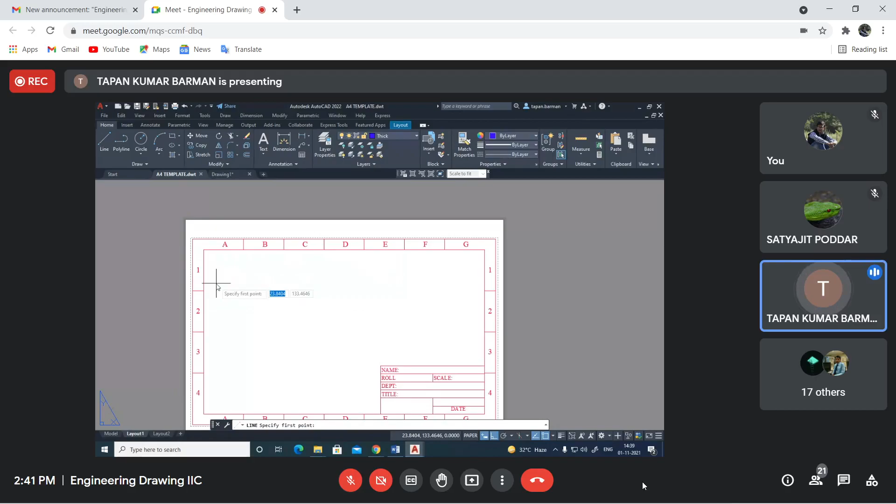Say for example I am using 1:5 scale. So what should be the value of this? 300 divided by 5, that means 60 millimeter. So I will make one line of 60 millimeter, and I will make that thing. Do you understand this?

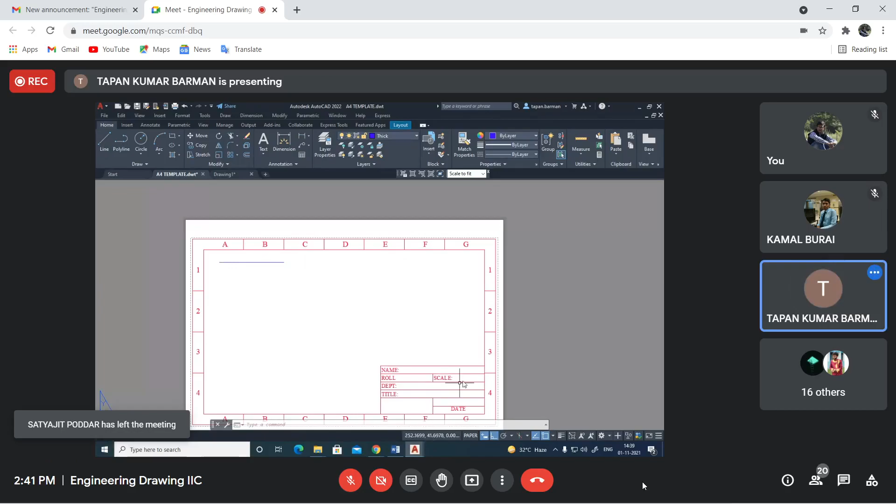But my requirement was 300 millimeter, and I am using scale as say 1:5. So manually I have to divide that dimension by 5 and draw a 60 millimeter length line, but I need to change the dimension. When I put the dimension, it will show 60 millimeter only. But I need to change it, because in the scale I have to write scale as 1 to...

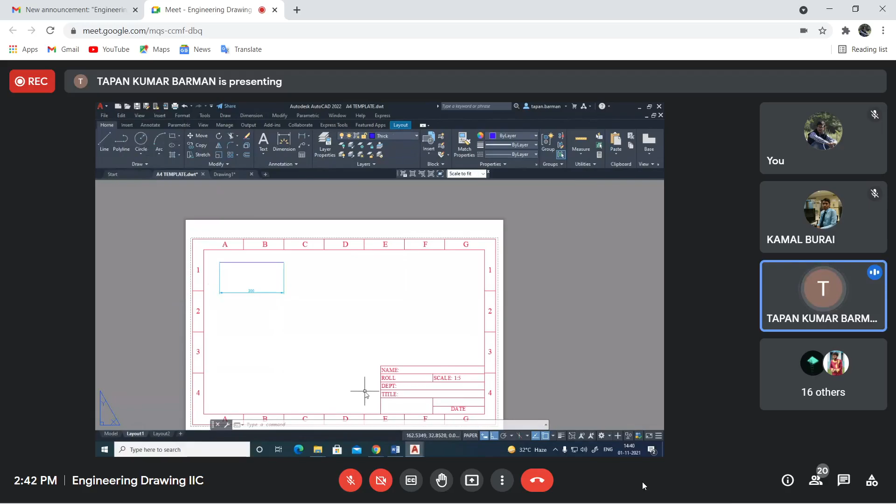1:5. So this 60 is not basically 60, so I have to change the value to 300 millimeter. I'll use the text override option and put 300 millimeter. Then only we'll understand from the drawing that the line is 300 millimeter length.

Understand this thing? In your manual drawing, in your engineering drawing class also, you learn this thing. Is it clear? Is there any doubt?

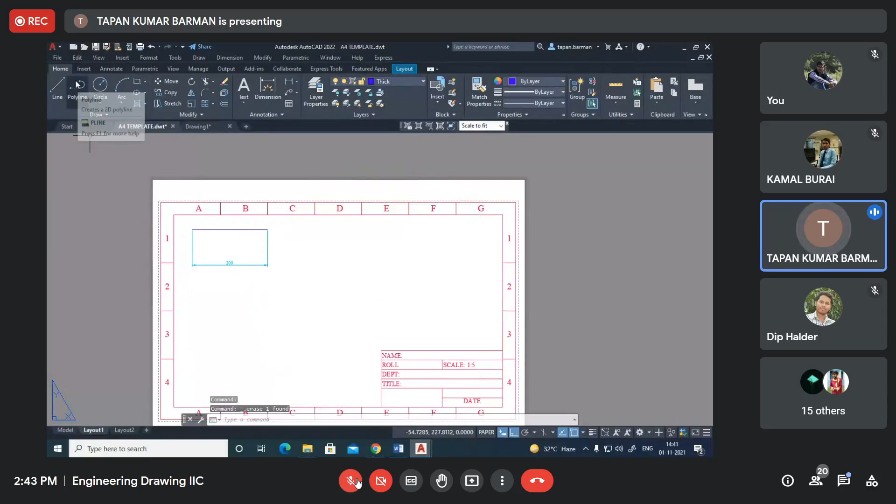Okay, say for example I am making one circle of say 100 millimeter dia -- no, 100 millimeter radius, say. So you see, I cannot make that circle here. So what I have to do? I have to reduce the dimension. So 100 divided by say 5, that is 20 millimeter is the radius.

Okay, now when I'll put the dimension, you see it is 40. But when I have made the drawing at that time it is 40, but original dimension was 200, or radius was 100 millimeter.

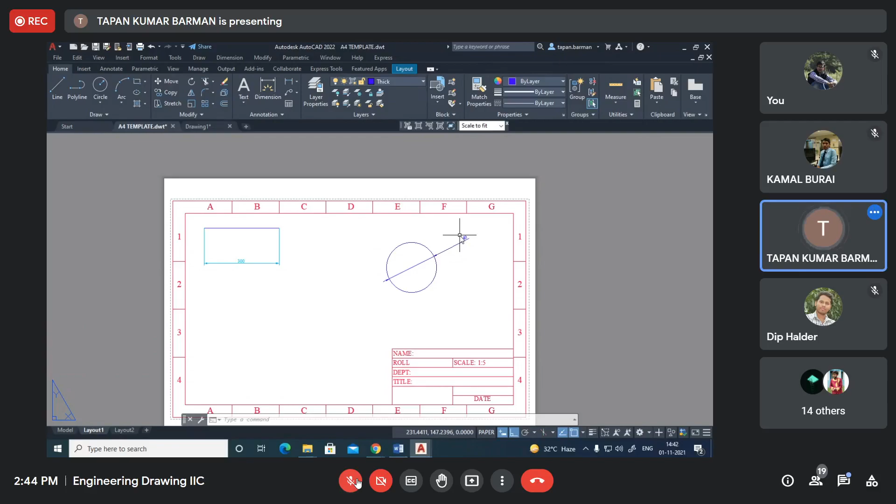But when I am using scale 1:5, I need to change that value. Manually I have to divide that 100 millimeter by 5, 20 millimeter should be the radius. Do you understand this thing? This is a concept we use in our engineering drawing class.

Now, when I write 40 millimeter here and scale is 1:5, but when I will measure using one scale, that value should be 40 divided by 5, that is 8 millimeter. But that is not here. So I need to modify this dimension.

I have to select that thing, right click, properties, and from the properties under text, you will find text override option. So here I should write 200 because I have used scale 1:5. So it should be 200 millimeter.

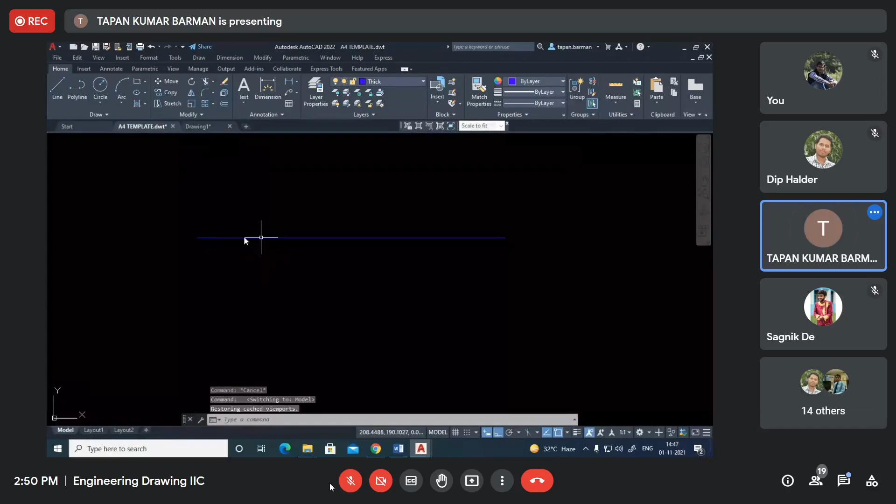Understand? Now I have made one line of say 300 millimeter length here in model space. The same type of line of 300 millimeter I have made here in paper space using a scale 1:5.

Now, if we may access the model space, that means this line inside this paper space, then we can fit our drawing inside this. Now our target will be to access the model space. This is paper space. I will try to access the model space inside this paper space.

Sir, your voice is breaking. Is it true for all students? No, sir, it's okay. So then I have an internet issue. Yes, probably. So later on I will also upload the recorded class. Please go through it.

Okay, sir. Now the thing is, from view, we may insert one thing, viewports. Later on we will discuss what is viewports. First you see what happens. Viewports, under viewports, I am taking say one viewport. Say for example, I am making one boundary or window like this.

The boundary, after selecting the boundary, basically I should select the proper layer. So viewport layers, we have made one viewport layers. So this is viewport layers. Now inside this you can see one blue line. That blue line is basically the line I have made in model space. So using viewport, we may access the model space.

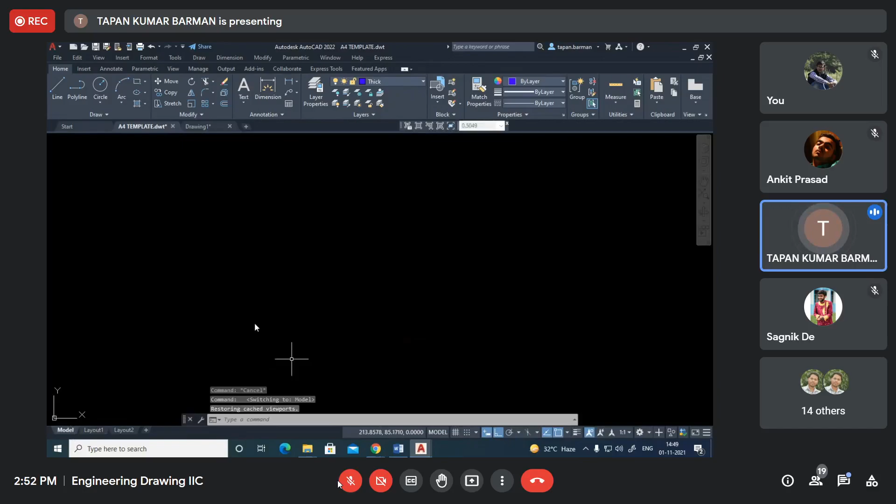Can you see this thing? So this is model. Inside the line, if I delete this line, say for example, I am deleting this line. In model also, that line is not available. Understand? Because I am accessing the same model space inside the paper space using the concept of viewport.

Say for example, I am making one line. Say this is a starting point. I want to make one line of say 300 millimeter. Now let us see whether in model space that line has been drawn. Yes, that line is there.

Say for example, here inside this, I want to make one circle. Okay, I am taking some midpoint. What is the value? Say 100 millimeter. Okay, let us see that circle is also here.

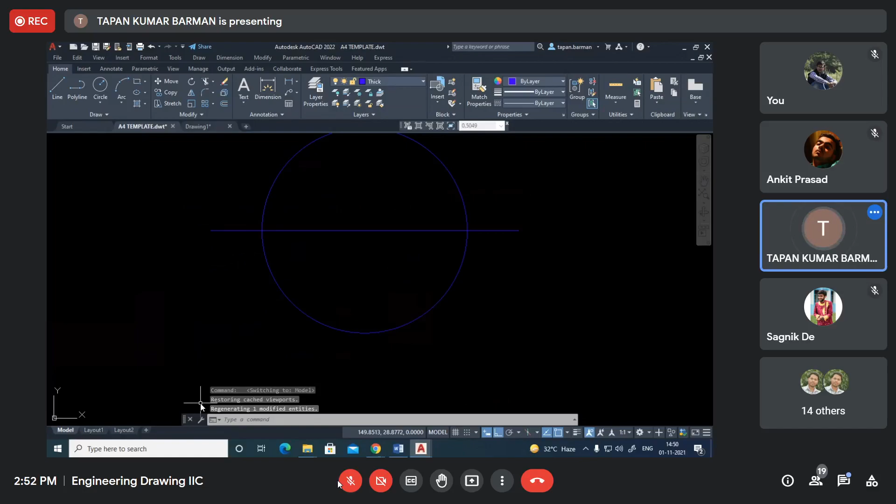Now, do you understand that inside this paper space, using the viewport, we may access the model space? Yes, sir. Is there any difficulty to understand this concept? No, sir. You see, in our last assignment, we have made the lines only in this paper space.

But here, inside this paper space, making one boundary or using one viewport, we can access the model space. And in that model space, we can make our drawing in 1:1 scale.

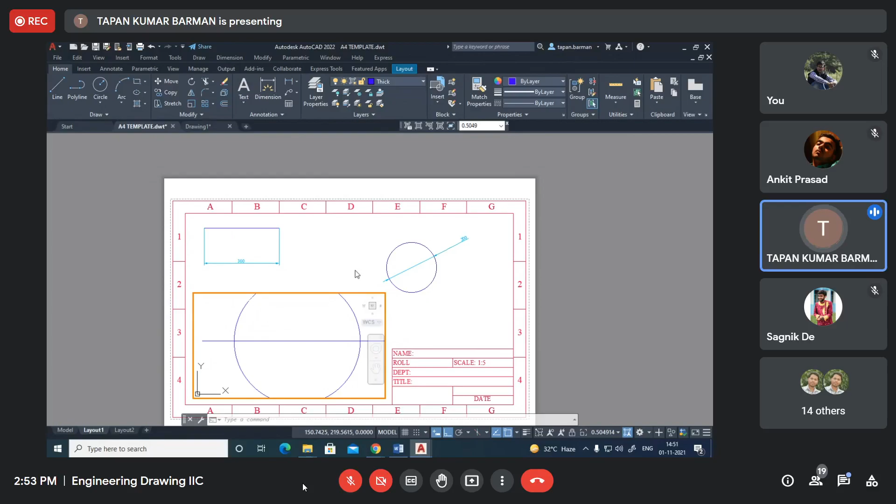Now, what I can do here, I can select the boundary, and this is called viewport toolbar. And from here, I can make say 1:5.

Now, you see, if I try to put the dimension, I should get 300 millimeter. Let us see. Dimension, linear dimension from here up to this. This layer should be changed to dimension layer.

Is there any difference between this one and this one? Yes, this is drawn in paper space, this is in model space.

So same thing can be drawn in model space using 1:1 scale. After making 1:1 scale, depending on the paper size, depending on the layout or template, you may select a proper space, a proper scale to fit your drawing inside your available space.

This concept is clear to you? Yes, sir. Is there any difficulty to understand this thing? Okay, I am deleting this thing.

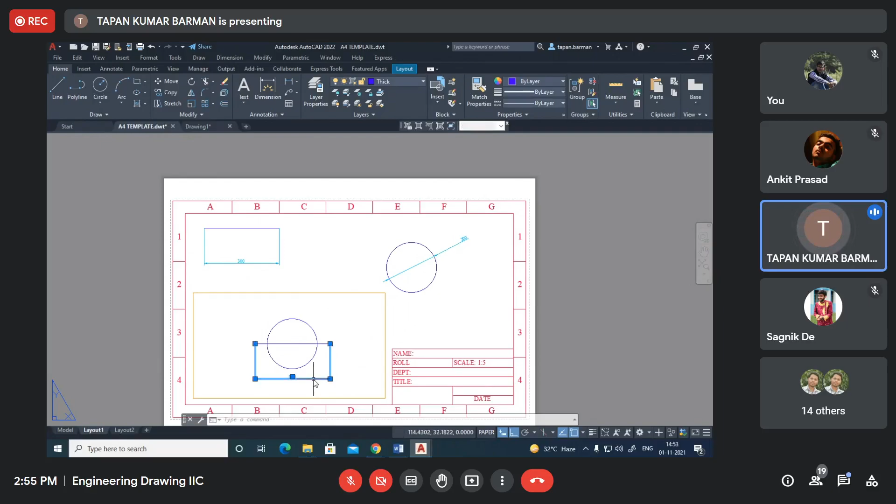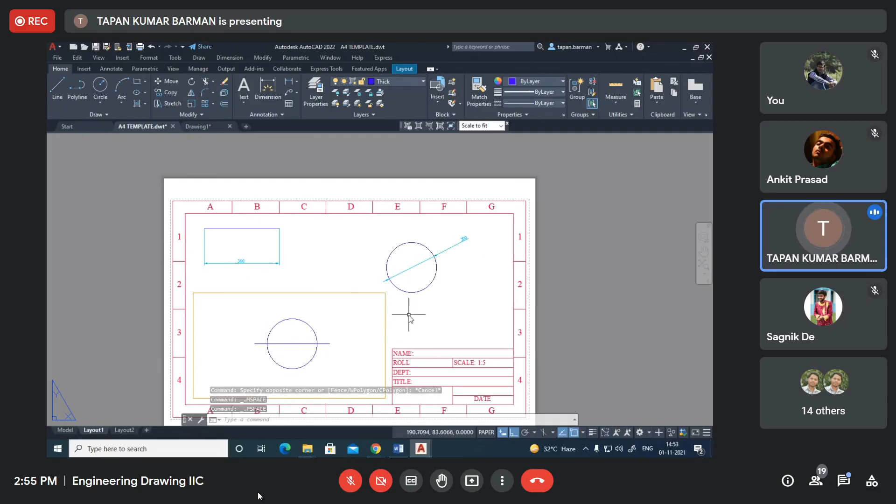Right now, I am in paper space, right? You see, this is paper space. When I will be in model space, you see, this boundary will be very thick. Double click outside this paper space, outside the boundary, then you will come to paper space, or from here also, you may change paper space to model space or model space to paper space.

Now what happens if I draw anything in paper space, whether that information will be transmitted to model space? The answer is no. Let us try. Say for example, through this I am making one line. Now see, I have drawn this vertical line in paper space. Now in model, you see that vertical line is not available here because we have made that vertical line in paper space. It is not in model space.

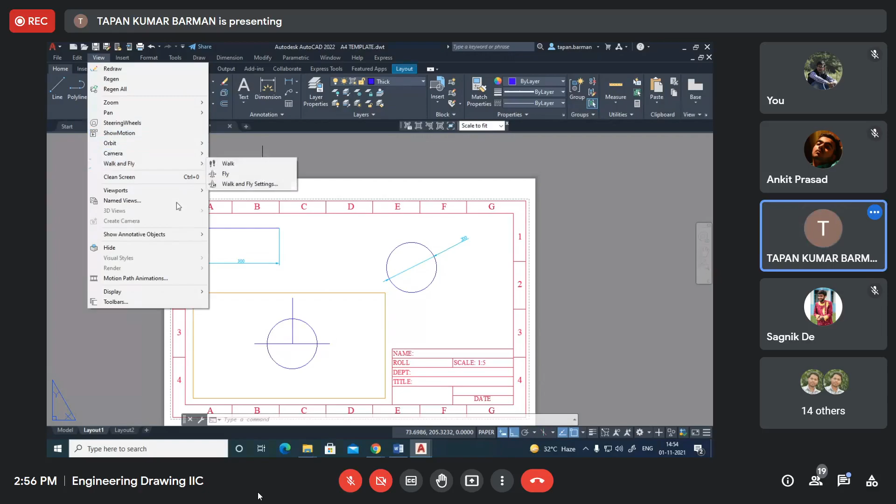If I draw anything in model space, that drawing will be available in other model spaces also, or other viewports also. Say for example, I am making another viewport. I am deleting this thing. View, viewports, another viewport, say here. I am changing the boundary of the viewport. Now see, the same thing is also here.

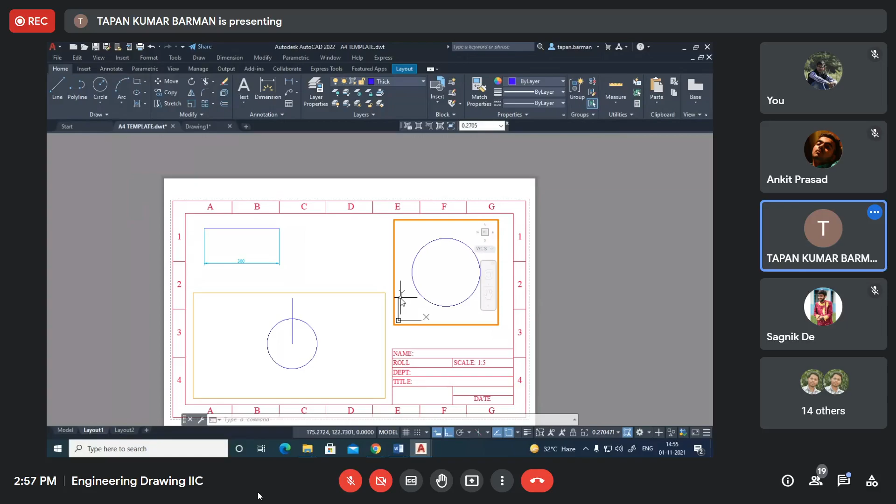If I double click here, I can access the model space inside this viewport. If I delete anything here, you see the selected objects will be deleted from the model space. So if I insert a number of viewports, we may access the model space. Is it clear to you? But if I draw anything in paper space, that information will not be available in model space. Is it clear to you? Is there any question? Can you do this with your computer? Can you do with me?

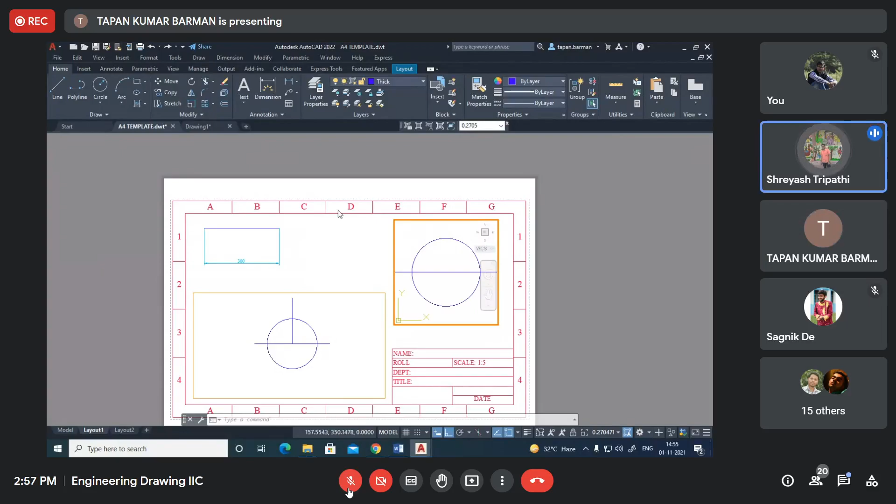Hello, sir. Sir, actually, when I am opening this template, then my previous work is showing. You open your template only. Yes, sir. But the assignment which I have done, that is showing. Then you save your file in a different name. Then you delete that part. Definitely that window will not come then. Understand? Basically the recent files are showing there. So somewhere you have saved your template. So you should not disturb your template.

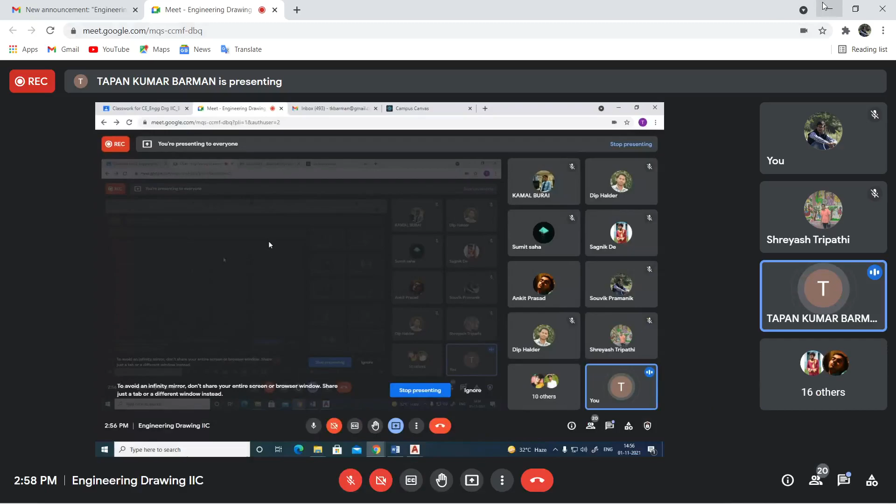You may open your template, you may draw, and you may save your drawing file, DWG, in a different name. Always you should open your template. You may work over there, but you should save in a different name for that assignment. So right now, you may select all the drawings and delete them. Then you may work over there. Understand? Okay, sir. So this concept is clear to you?

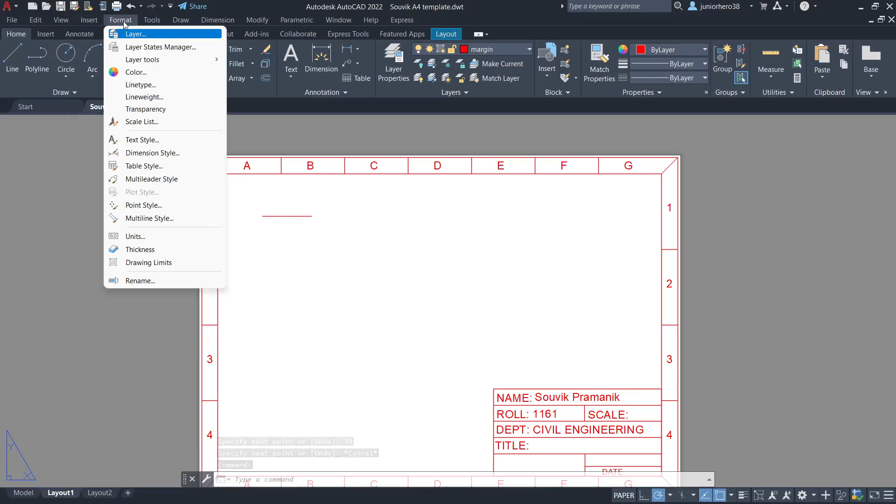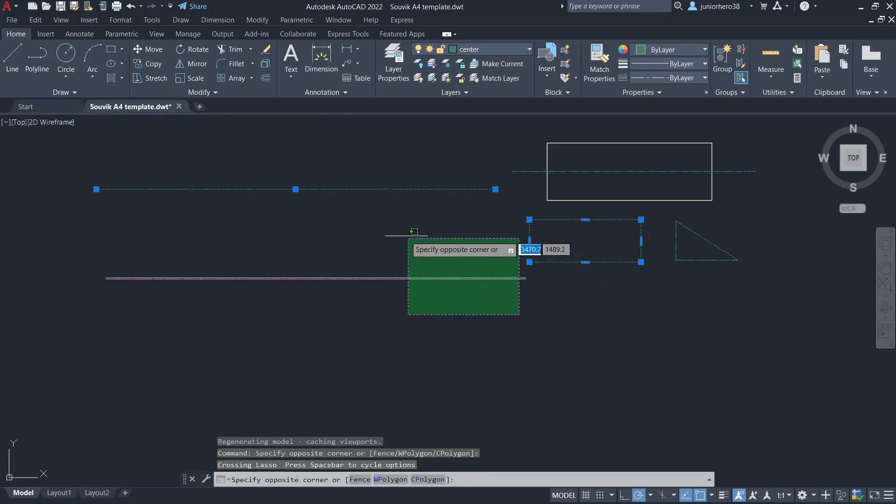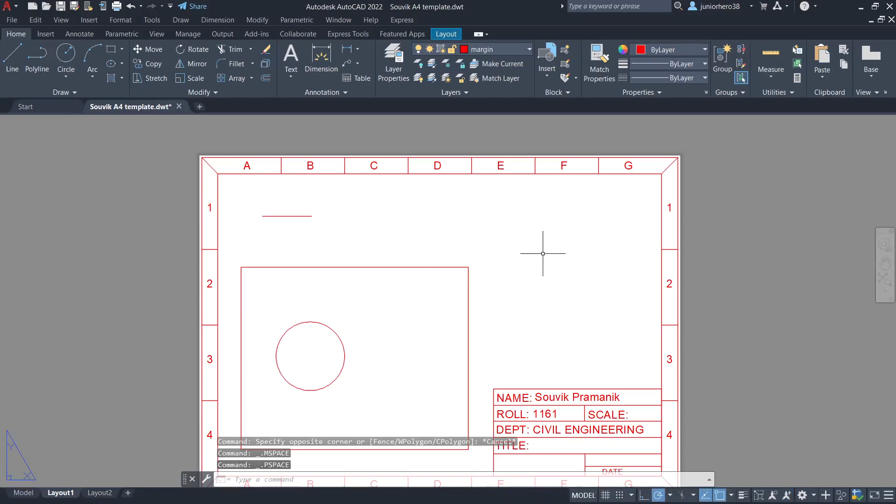Now, for the earlier drawing, you have made the dimensioning, right? Here also I have made the dimension. Say for example, I want to make this as 1:2 scale. Oh, sorry. I am increasing the boundary of this. I'm deleting this thing. Okay. So now the scale of this drawing is 1:2, and the scale of this drawing may be 1:5. So I am changing the scale here. So here scale is 1:2, here is 1:5.

Text. Okay, yes, 1 minute. Hello, sir. In AutoCAD 2007, I can't find the scale menu. Okay, 1 minute. Writing it. Scale, say 1:2. Sorry. Okay. Say scale 1:2. Here is scale 1:5.

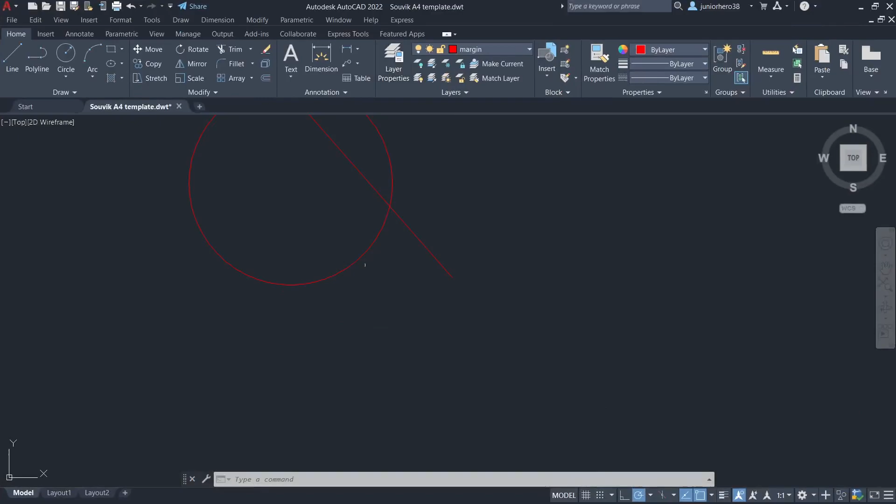Now how to change the scale? For that purpose, you need to find the viewport toolbar. So how to find the viewport toolbars? From tools, you will find toolbars. Under AutoCAD, you will find viewport. This one. Can you find this? For AutoCAD higher versions, you will find it this way. For AutoCAD 2007 also, from tools under AutoCAD, you will find it, or by right clicking you may get the toolbars, and from there you may find viewports. Are you getting this point? Have you got this viewport toolbar?

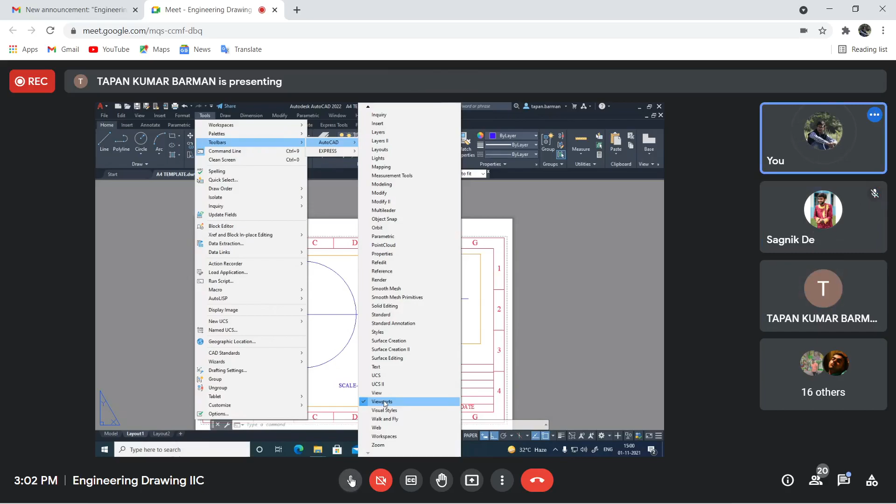Yes, sir. Okay, so you have to place your viewport toolbar where space is available. I have put mine here. You may put it at this position also, that is up to you. Once you have the viewport toolbar, you have to select the boundary. But when? When you are in paper space. By selecting the boundary, you may change the scale from here. It may be 1:2, 1:5.

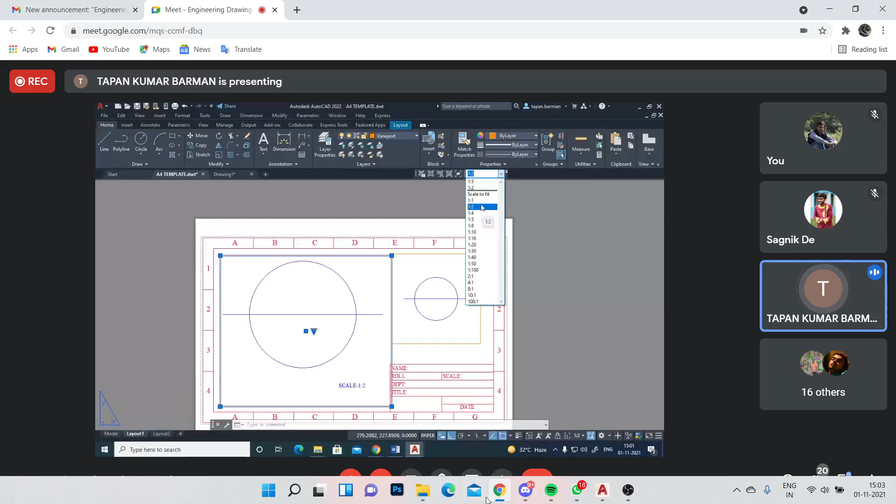For engineering drawing class, we should select the appropriate standard scales. It may be 1:1, 1:2, 1:5. 1:4 we do not use, 1:8 we do not use. So we use 1:1, 1:2, 1:5, 1:10, 1:20, 1:50 like this. Or 2:1, 5:1, 10:1 like this. Sorry, I changed it. This is okay now.

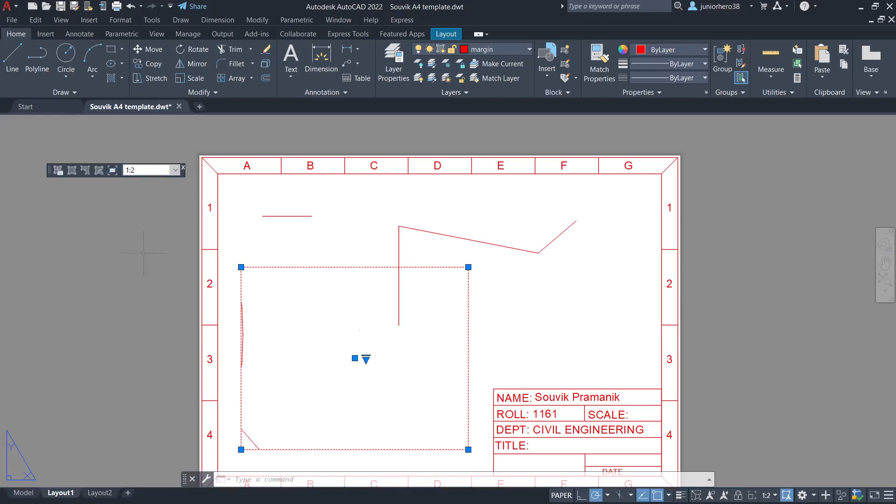Sir, is it possible to adopt 1:200 type scales? Yes, possible. 1:100, you may type here. Oh, okay, sir. Also 2000 is possible, that is up to you. If the scales are not available here, you may type the value here. Okay. Up to this, can you draw?

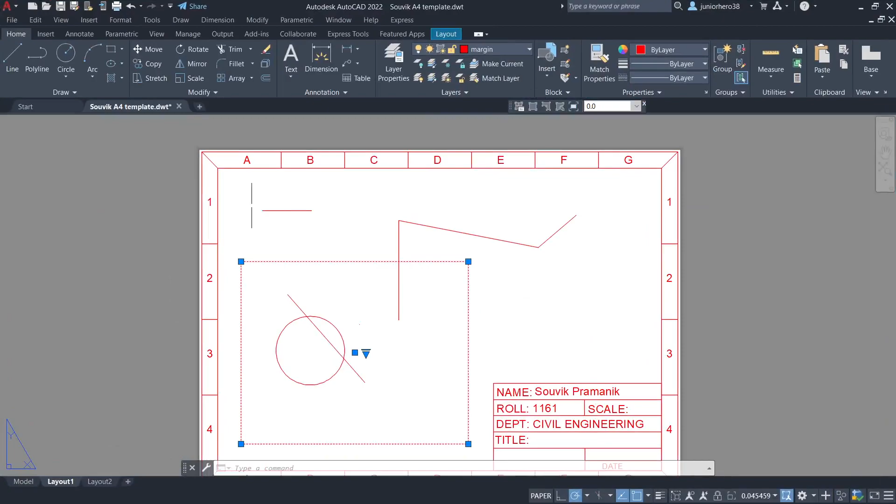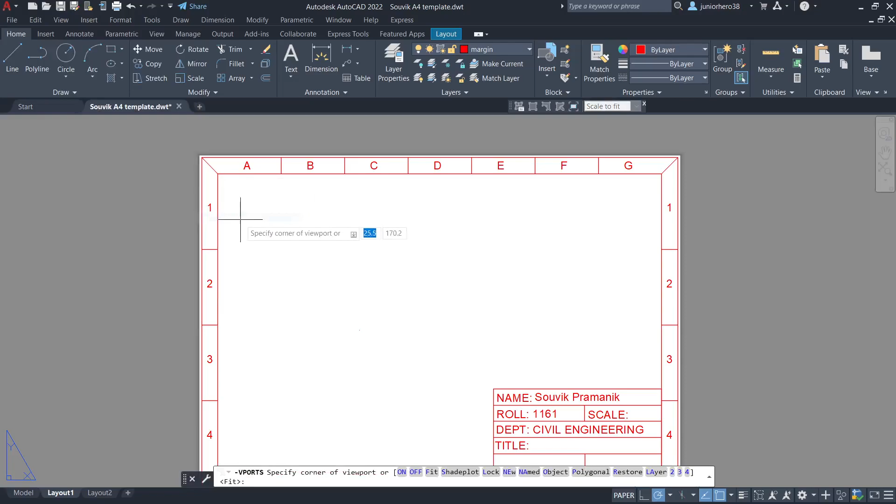Any problem? Are you doing it? Please do. If you face any problem, please let me know. It's one important tool we use in our AutoCAD drawing.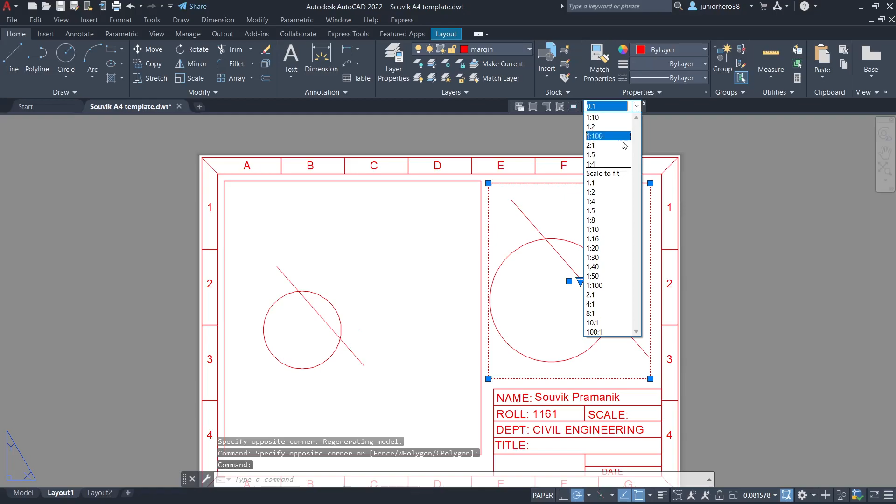Hello, sir. Yes, I can hear you. Sir, I'm drawing in model space, but it's not showing on the viewport. Okay, you may share your screen then. So, I have drawn this circle, but it's not showing on the viewport. Okay. Then in the command line, you type zoom, Z, enter, all. Go for all.

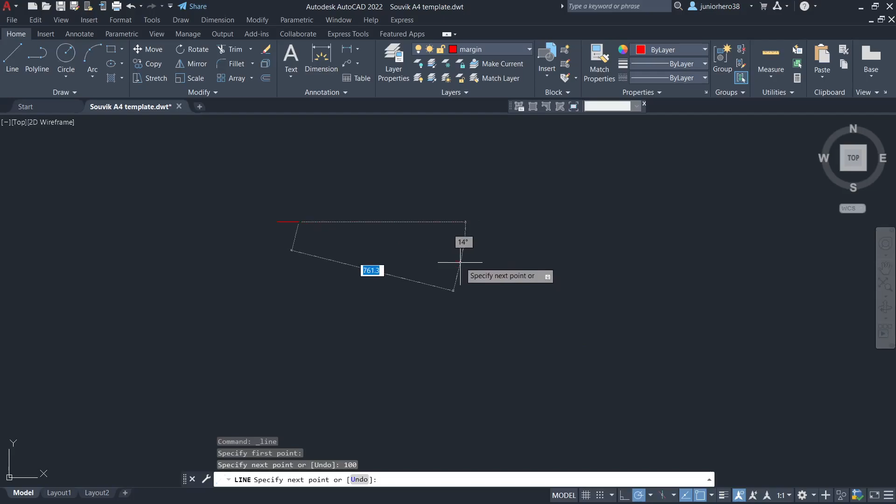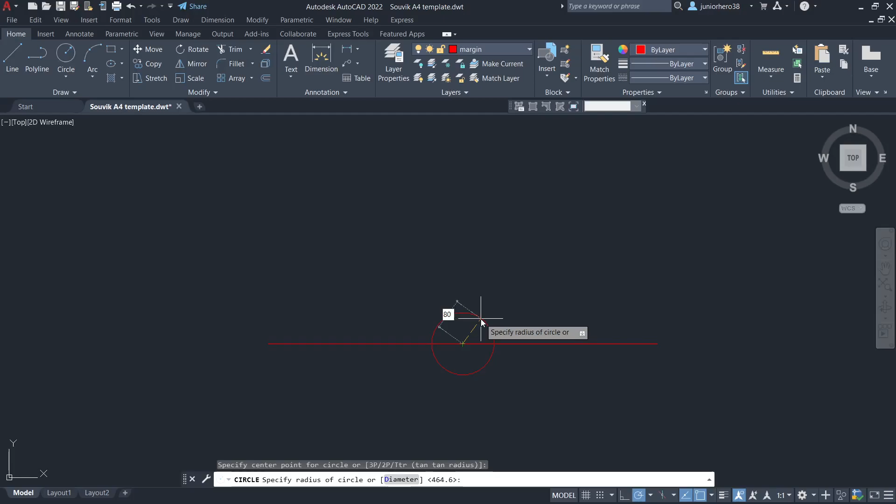Sir, maybe he didn't select the viewport. No, it should come automatically anyway. Yes, you select that one. Select that. Now you put the command. You go to model space, not paper space. Right now we are in paper space. Not here, in layout one, where coordinates are showing. After that you will find paper. You select model. Okay. Now you put the command. Okay, sir. Zoom all.

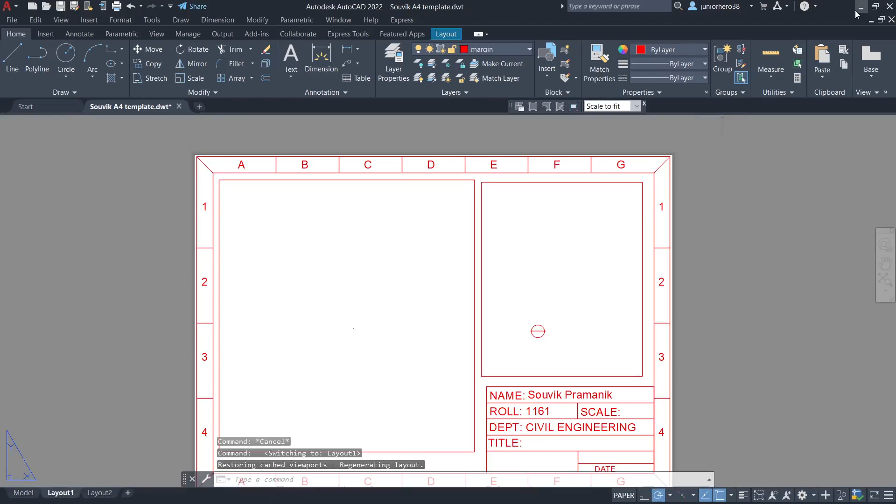Sir, but if I want to select this one? Yes, double click inside the boundary. Not the boundary, inside the boundary. I'm clicking. Then the boundary should be thick. It is paper space. Double click inside the boundary. You want to make the viewport. Yes, sir, I'm clicking, but the viewport is not showing there. It is only in paper space.

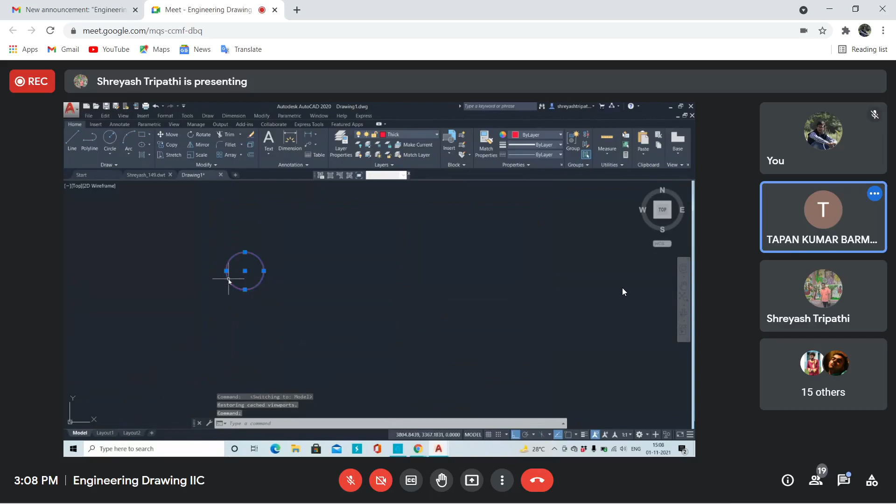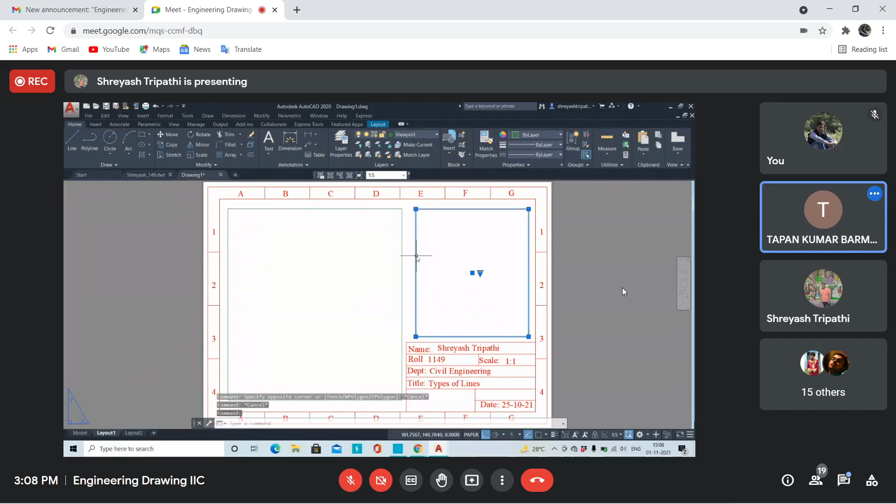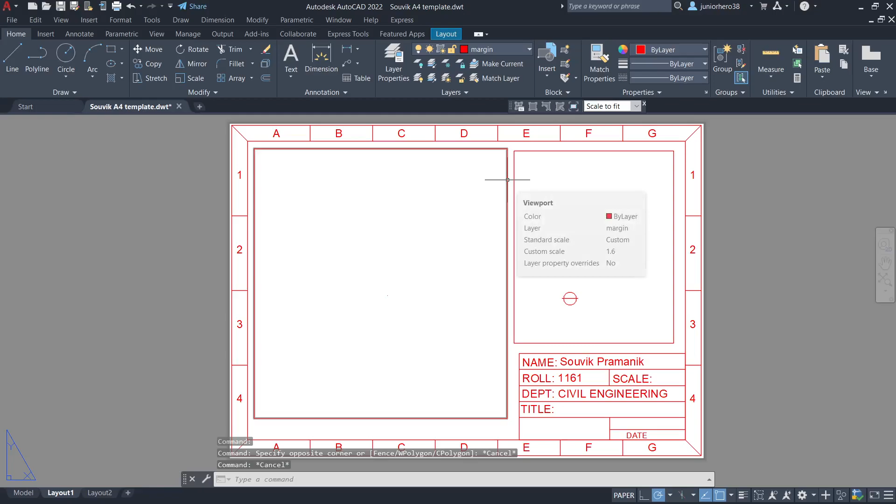Not like this. First you take a simple one viewport. You delete these two. This one also. Delete this one. Okay. Go to view, viewports, one viewport. Make one rectangle, say, not using your command. Okay. Inside this viewport, double click. Yes, sir, I've clicked, but it is in paper space. Oh, yes, okay, done, sir.

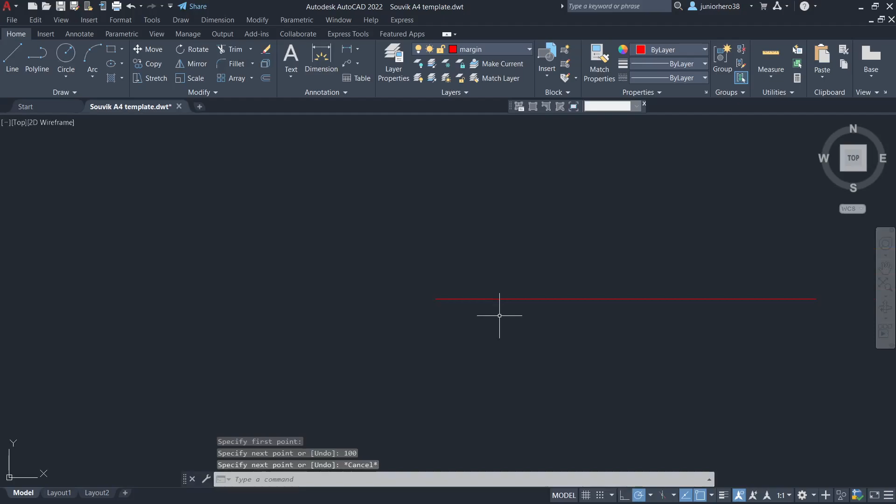No, your viewport is not drawn. Click there on paper. It should be changed to model. Then your viewport is not perfect. No, you delete this boundary. First, you change the layer to viewport. It is in viewport only. Select viewport. Go to view, viewports, one viewport. Do not take the rectangle command. Not line. You pick one point. Oh, okay, sir, I understood. Actually, I was taking rectangle, that's why.

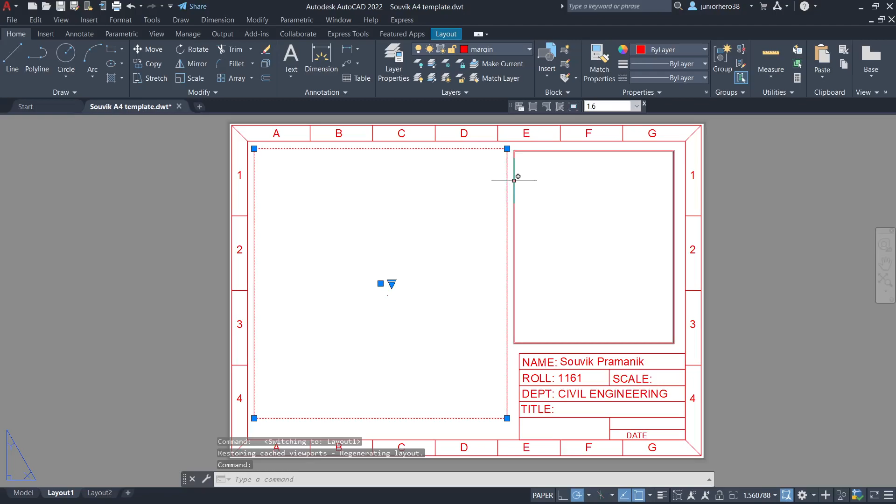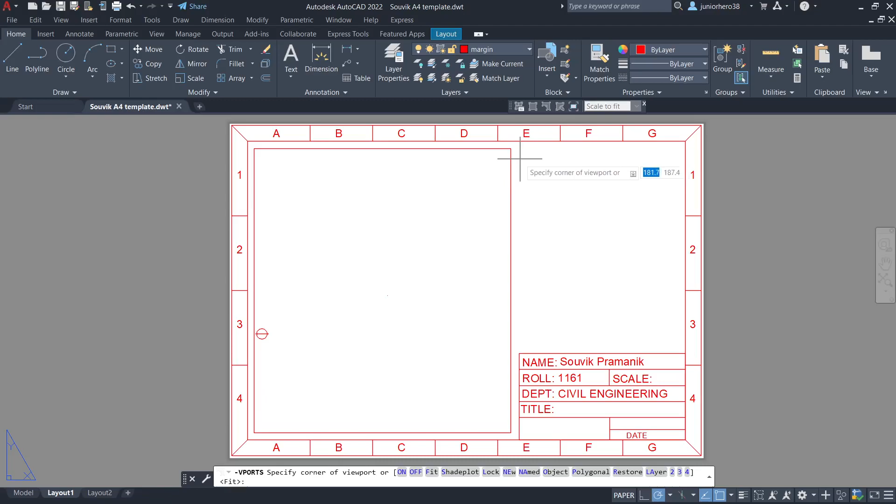Okay. Now you put the command zoom and all. Not here, in layout one only. Now your viewport is okay. Can you see now? Yes, sir. Thank you, sir. Any other problem? You should understand this thing. Do you have any other problem? Please do it. If you face any problem, please let me know. May I proceed?

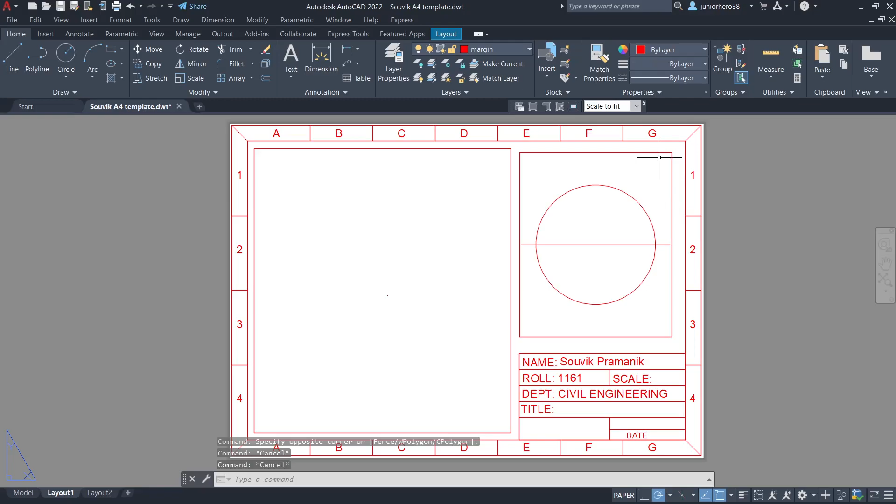Okay. So the viewport toolbar is not here. Okay. Go up.

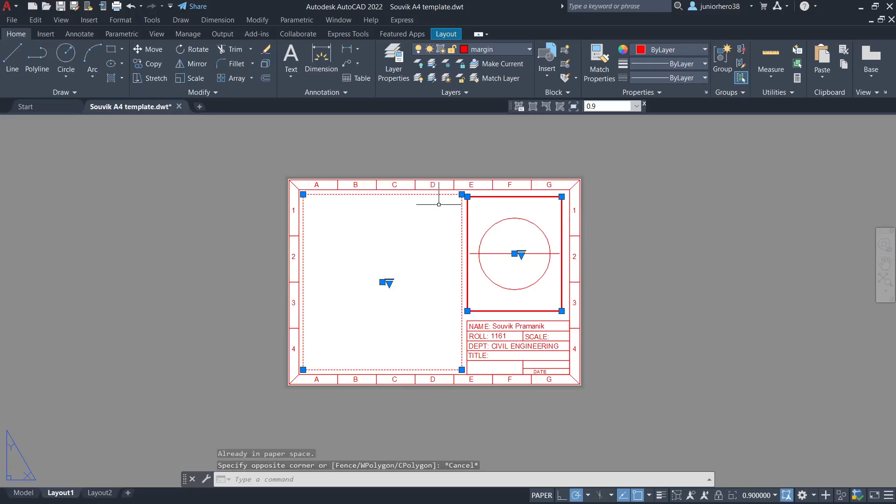Above this, you right click anywhere. Right click, not left click.

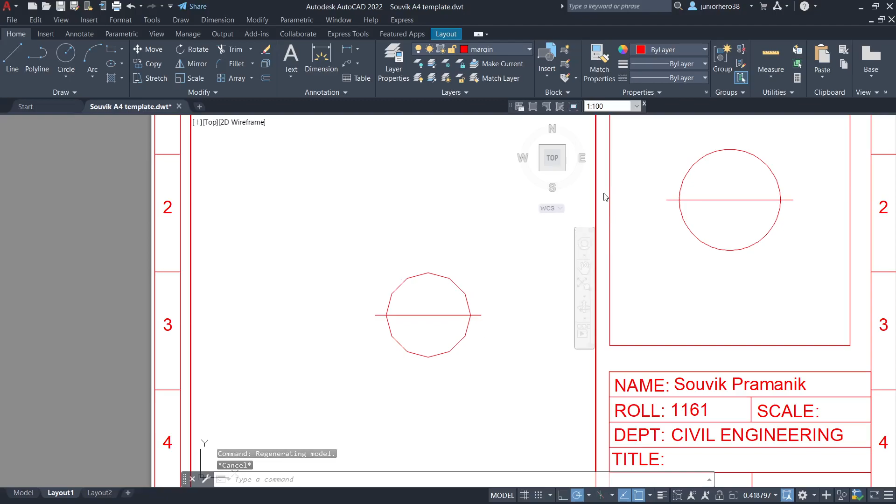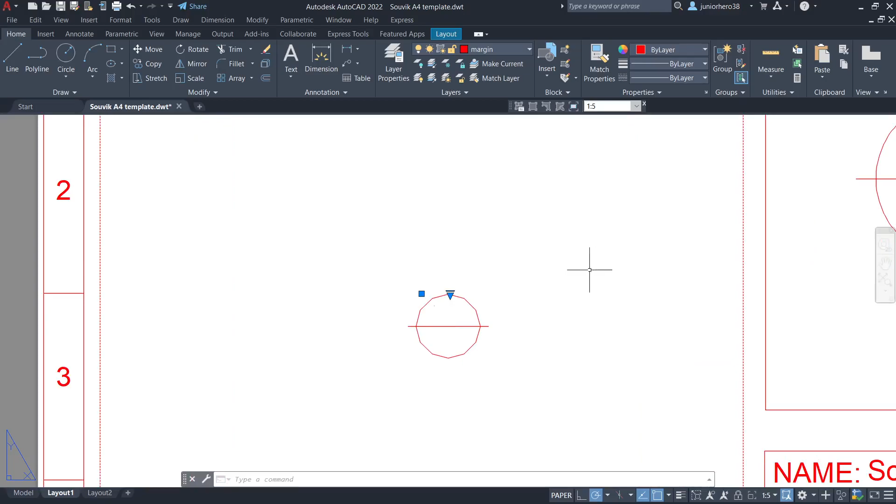Any problem? May I proceed? Yes, sir. So do you understand the concept of viewports? Why we should use the viewports? That idea is clear to you? Yes, sir.

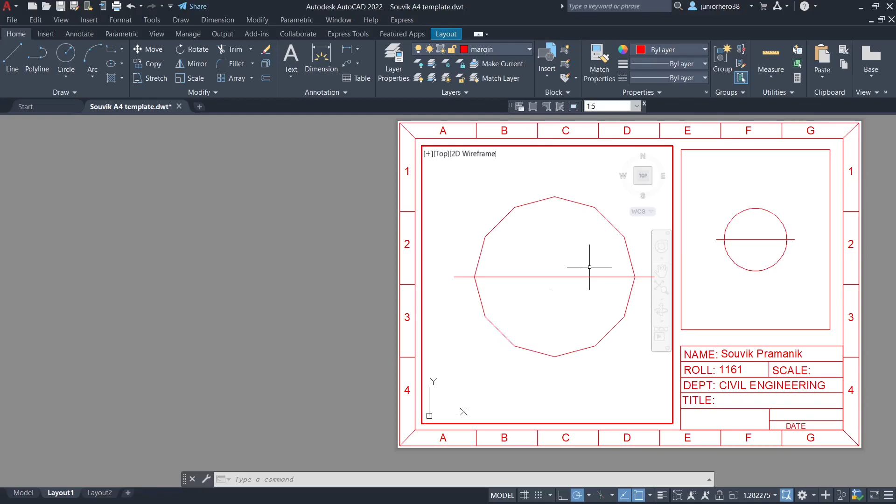Now in the viewports, we may access the model space. But the thing is, in the model space, we may draw our drawings. Now the question is where we should put the dimensions. After making the drawing, we have to put the dimensions. Now in model space, if I put or if I draw anything, that should be transmitted to the other model space or other viewports also.

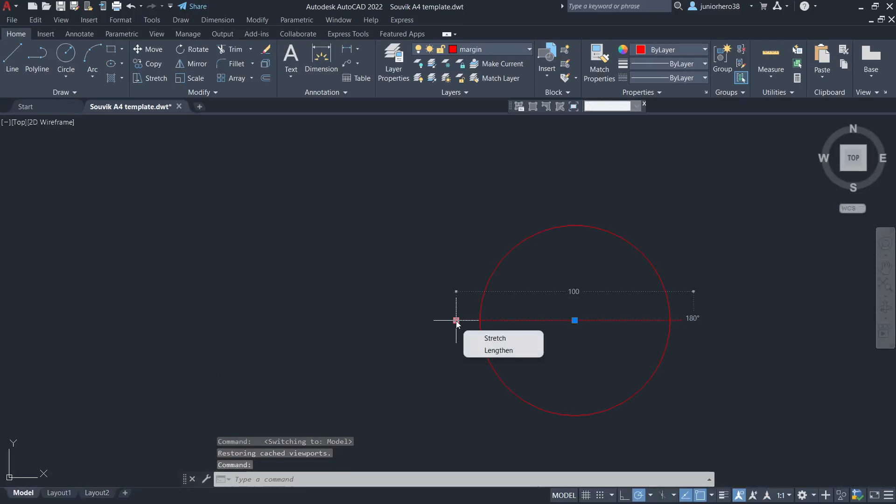Say for example, I am giving the dimension here of this line. I am changing to dimension layer, okay? So that thing should be available here also. You see, that value is also here. But since I have reduced the scale, or I have taken one scale which is lower than this drawing, then that value, your text height, is not visible. Text is not visible. Arrowheads are not visible. Right? So this is happening since we are reducing the scale.

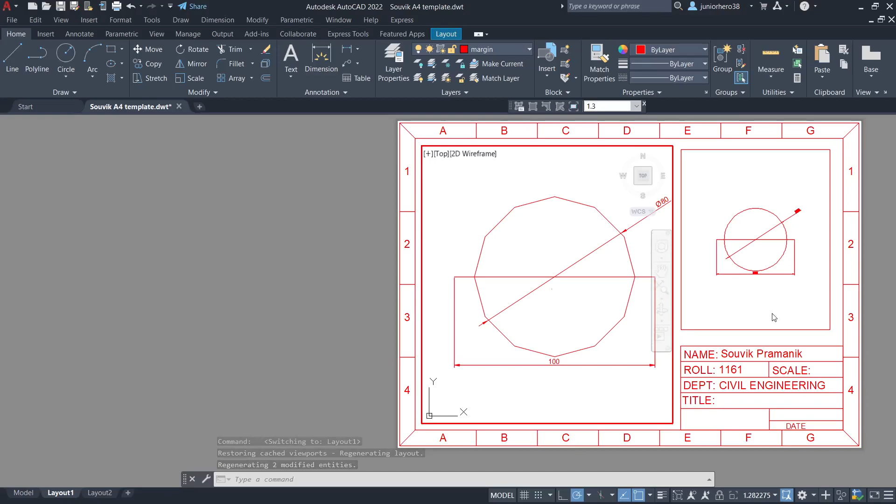Now, depending on the text height, if I choose one lower scale or upper scale, your text height will be changed due to the change in scale. Do you agree with me? If I put the dimension in model space, but in viewports we use different scales, depending on the scales your text height or text or arrowheads may be changed. Do you agree with this?

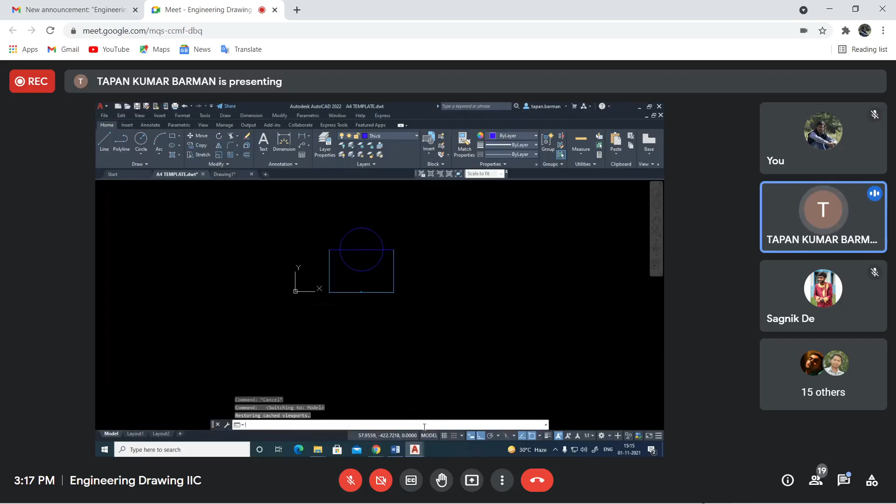As you know, in your engineering drawing class, we use some standard text heights. It may be 2.5, 3.5, 5, 7, 10 like this. We should not use non-standard text heights. Say for example, in 1:1 scale drawing, we have used, say... 1 minute, I am changing the position of this dimension. Okay. Here also in model space, in the viewport, that should be changed anyway.

My point was, suppose I take one text height of say 3.5 in 1:1 scale. If I take one lower scale of say 1:2, that text height will also be changed to 3.5/2, and that text height is non-standard. So we should not use that non-standard text height here. Always we should use the standard text heights, that is 2.5, 3.5, 5, 7, 10 like this.

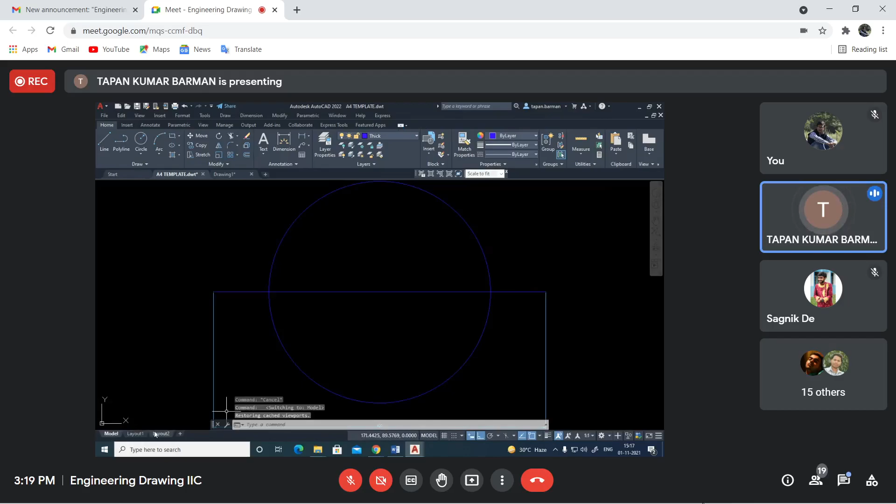Now the thing is, if I draw the drawings in 1:1 scale, and also in the viewport I use 1:1 scale, we fit our drawing in 1:1 scale, then there is no problem. Otherwise, depending on the scale, the text heights may not be standard. So we should avoid that. So better, if it is possible, to provide the dimension in paper space. So always we try to make the dimensions in paper space, not in model space.

Okay, please give me 1 minute time. After that, I will come. Hmm. Yes, I have come back.

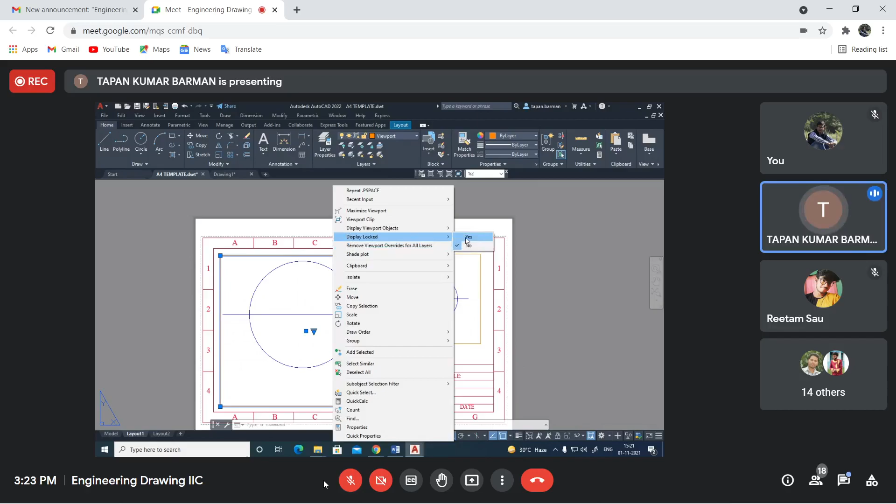If I do not use the display lock option, now see what happens. Dimension linear. Say for example, from here to here, I am putting the dimension. This one should be your dimension layer. Now say for some reason, I am changing this view. Now see, your dimension is here, but your drawing is in this position. Understand? So if I change the scale after putting the dimensions, your dimension may not be attached with your required lines or objects. That is the problem if we do not freeze the viewport boundary.

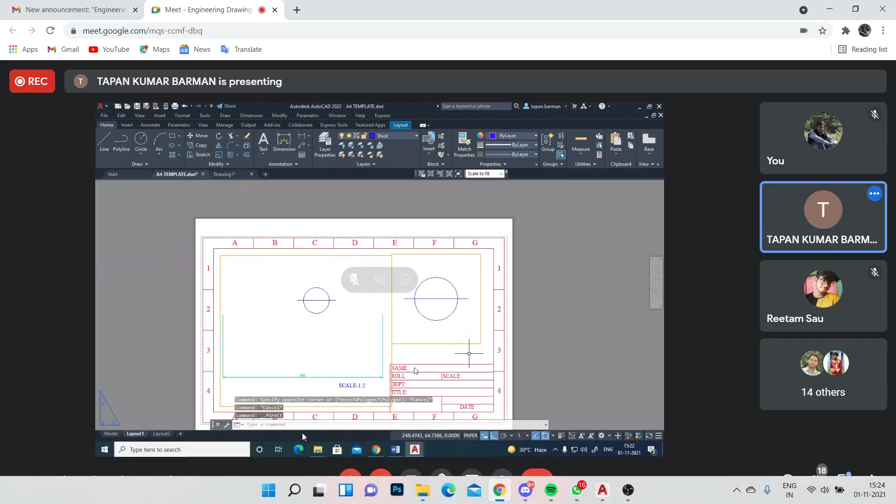Do you understand this thing? Do you understand the difficulty? So I should delete this thing. I should select a scale of 1 to 2.

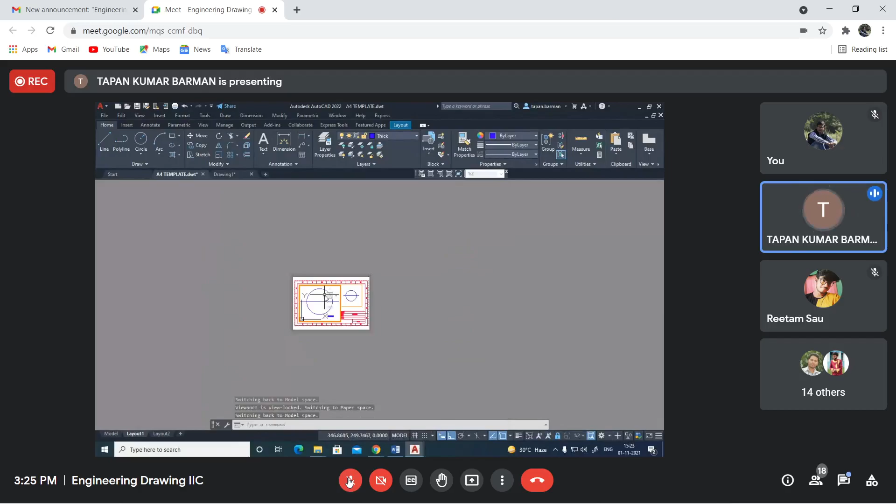So first I have to fix the position of the drawing inside the viewport. Then, selecting the viewport, I should set display locked. Yes. Now you see nothing will happen. I am in model space. I am changing the position of this thing using my scroll button, but nothing is happening. Your position is fixed. So that is called display lock.

Okay. Now only you can put the dimension of the object. So I should change the layer to dimension, of say the diameter of this thing. Since we are providing the dimension in paper space, these things will not be visible here inside this viewport. If I make any dimension inside the model space, that information should be available here also. Is it clear to you?

Here also, since we have used a different scale, let us try to put the dimension. Now see, the dimension is the same, 300 millimeter, 300 millimeter, though the scale is different. Scale here is 1:5, here the scale is 1:2. When you are using two or three different scales in your drawing, you should mention the scale separately. Is it clear to you? Can you use? Yes, sir.

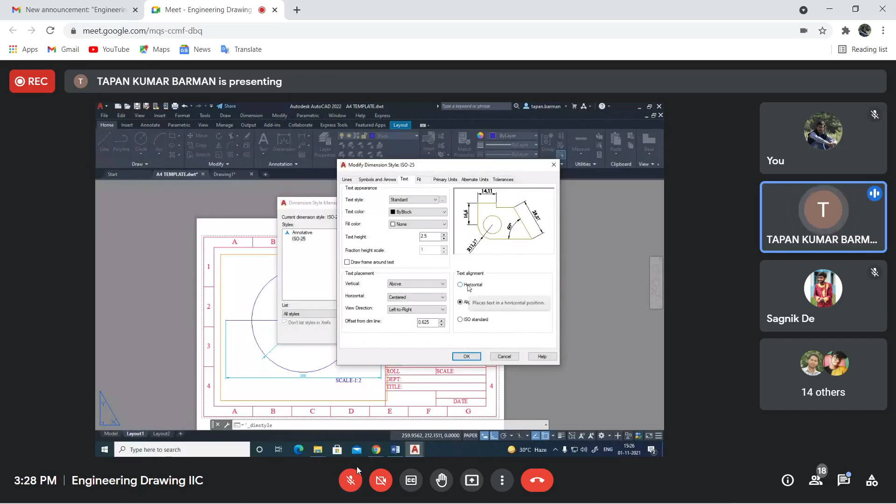As you know, in our drawing, we use two different types of dimension style. One is called the aligned system, one is called the unidirectional system. So from here, under text, you can change it: horizontal or aligned with dimension line. Horizontal means basically the unidirectional dimensioning procedure. Now, is it clear to you? Can we use viewports to make the drawings? Yes, sir. Any difficulty?

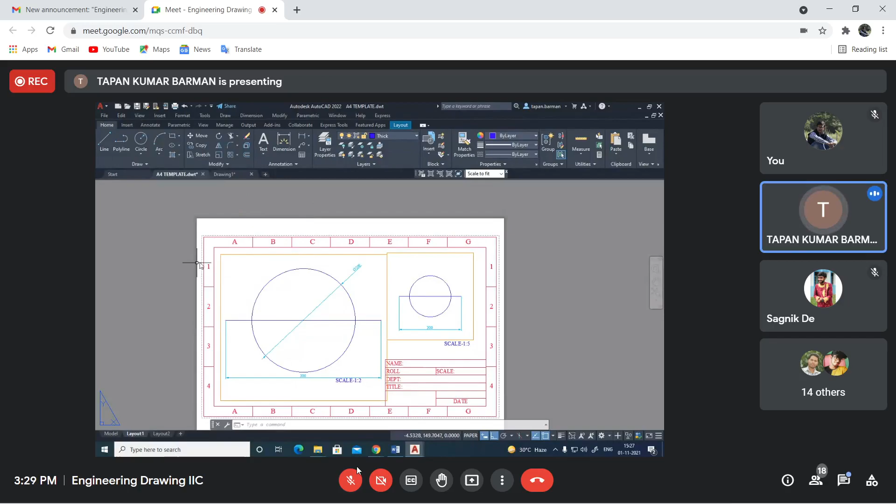Now here also in viewport, you see polygonal viewport is there. Sometimes it may be required to make the available space like this polygon. Okay. Then we will take a polygonal viewport. Here we have used one viewport or two viewports like this. Here basically we can draw one rectangle to make the boundary of the viewport. But in a polygonal viewport, we can make one polygon to define the viewport boundary. Is it clear up to this? Then I can delete this thing to show that.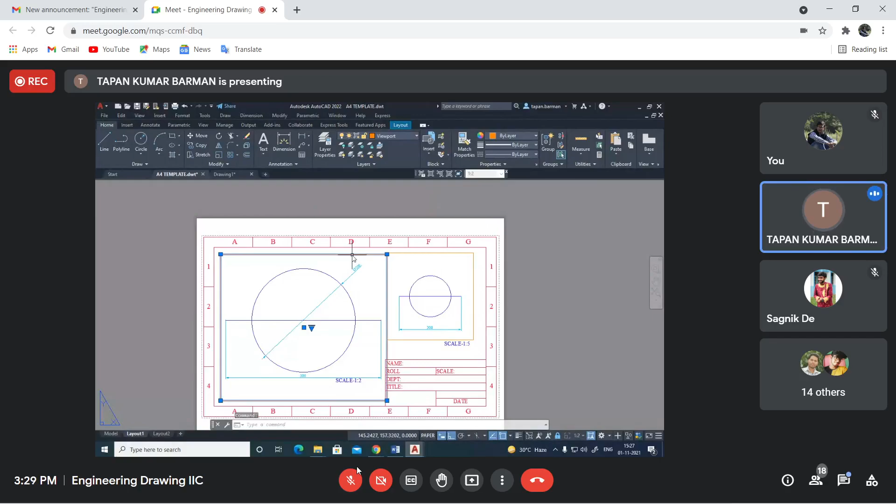Sir, after the print copy, will the boundary of the viewport be shown or not? Later I'm discussing that thing. One minute. Okay, sir. First, I show the polygonal viewport.

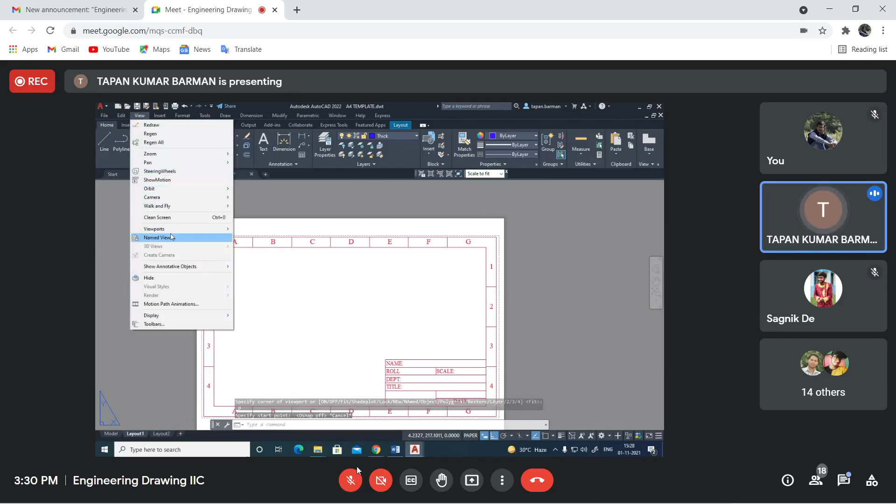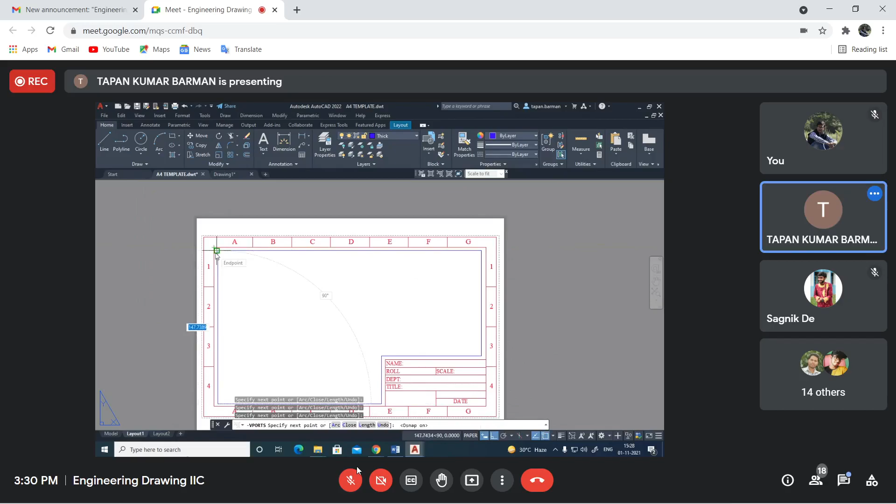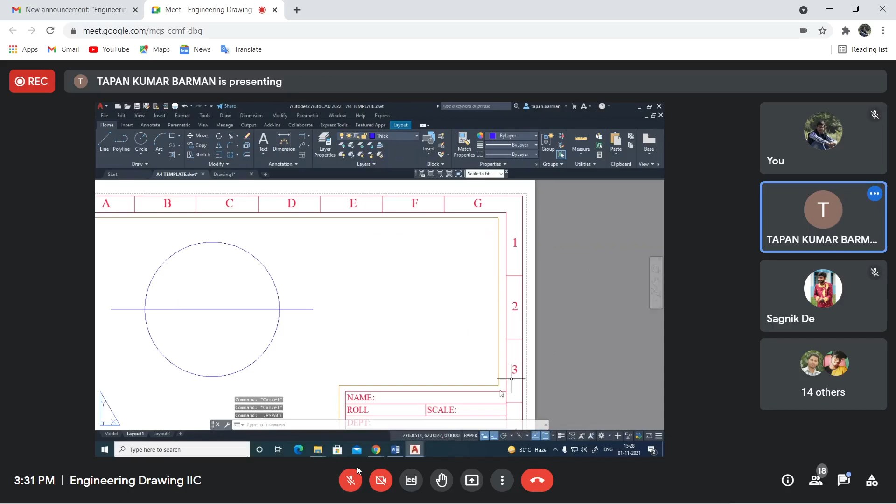So for the polygonal viewport, you may start from this point. Also, you can make a separate point here. Where is viewport? Yes, polygonal viewport. Suppose from here I am making this thing. It may overlap with your other lines also. There is no problem. So this viewport boundary should be changed. So this is basically the polygonal viewport. Is it clear? This boundary is not rectangular, but we can make one polygon to define the boundary of the viewport.

This question is right. Whether we should put the viewport boundary in the printing? No. So from your layer properties, we have to turn off the printing option of this viewport boundary. When you take the printout of your drawing sheet, this viewport boundary should not be shown. Okay. When you work over here, you can see the boundary, but when you take the printout of this drawing sheet, that boundary will not be there.

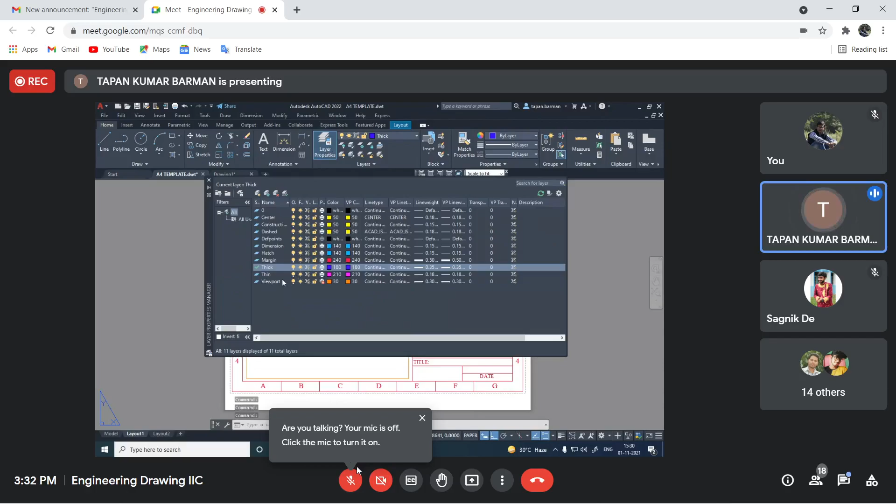If I use this on or off option, then that boundary is not visible, so it will be very difficult to work over here. That is why the on/off or freeze option will not work. But when you take the printout, the printing option should be off. Understand? Printing option should be off. Is it clear? Yes, sir.

So you have to take viewports. You have to use standard text heights when you do the dimensioning. Before dimensioning, you should fit your drawing inside the viewport, taking a proper scale. After that, you should freeze the boundary of the viewport. Then only you should put the dimension of your drawing. Is it clear?

Now, I am showing two figures. Say, for example, this one. Very simple drawing. Using two viewports, there are two drawings. Okay. Using two viewports, can you draw these two drawings?

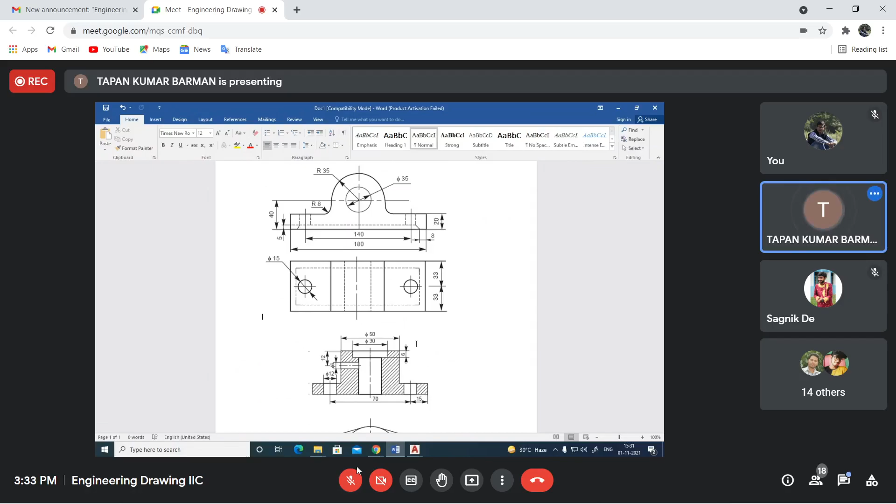In model space, you can make this thing. In 1:1 scale, you draw this thing. But when you access the model space inside the paper space, using two separate viewports, you use the proper scale to fit the drawing inside that A4 drawing sheet. Is it clear to you what you have to do?

If you find some dimensions are missing, you may assume the dimensions. Can you make the drawings? Very simple drawings are there. Yes, sir. Okay. So I am putting in the assignment.

Sir, in two viewports, should we use different scales or same scale? Depending on the paper. You have to decide whether you will use two different scales or the same scale. There is no problem. If you use two different scales, then you should mention the scales separately. Okay, sir. Yes, sir. 1 minute.

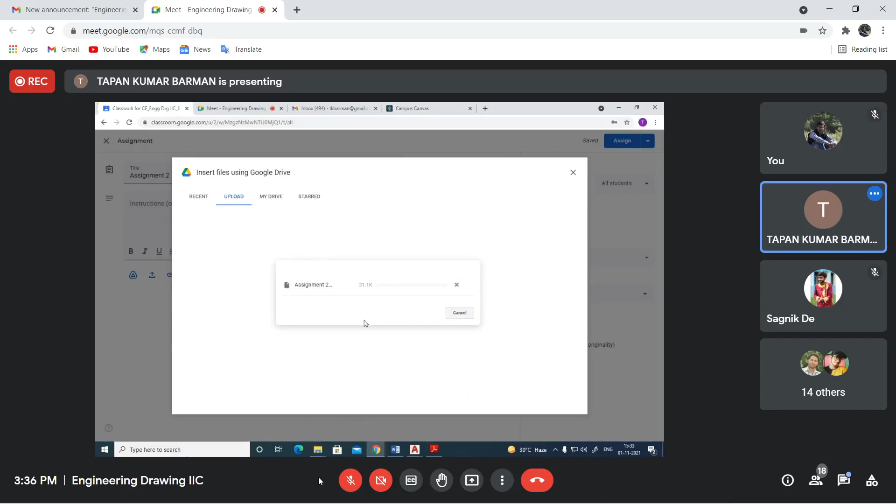So today, can you submit it? Is a little time possible? Give it. How long? Sir, 1 or 2 days. 2 days. Okay. Today is Monday, I think. 1, 2, 3. So by 3rd, 11:59. Okay. Is there any problem to submit the drawing by November 3rd?

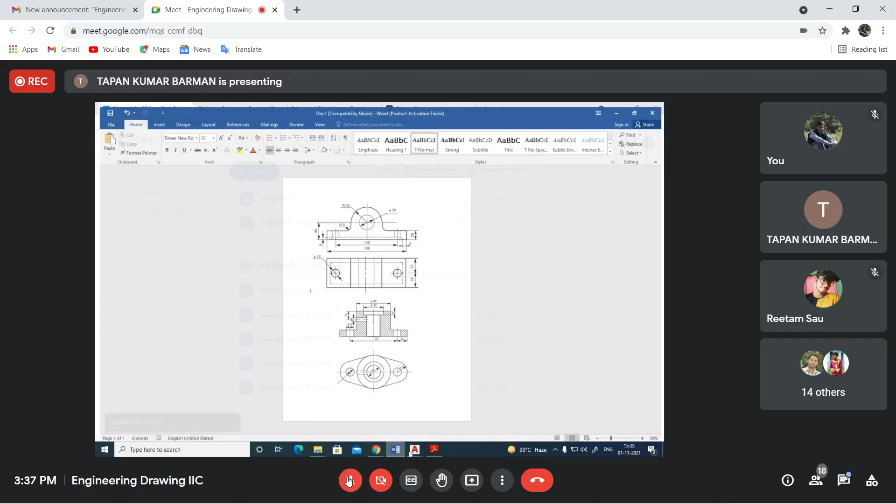Now please tell me your questions.

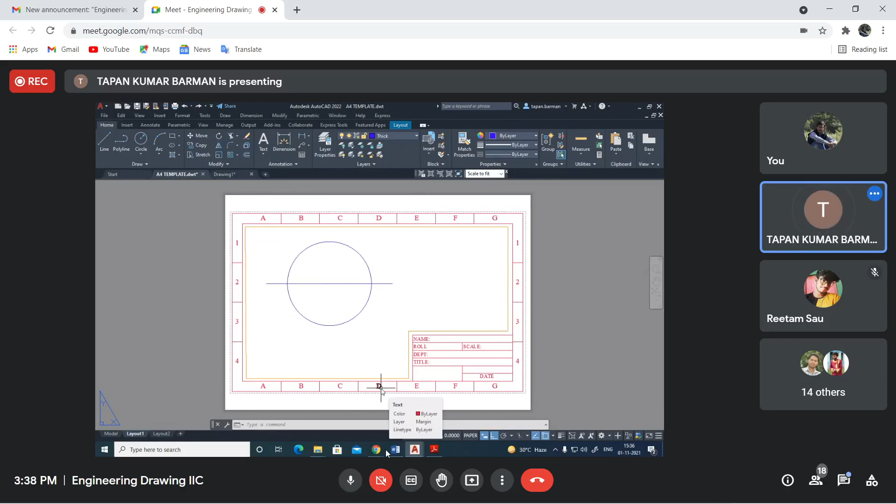Not 4 drawings, not 4 drawings. If you understand the drawing, this drawing is related to this one. This is one view, this is another view. Say this is your front view, this is your top view. Understand? So these two views should be like this only. You cannot put this lower one here. Okay, understand? So this is related to this one.

As you know from your engineering drawing class, you have used 3 principal planes where you can project your drawings. Okay, so you cannot change the position of it. Understand? So these two should be like this. The gap between these two views, you may adjust. It may be a 10 millimeter gap, 50 millimeter gap, 20 millimeter gap. That is up to you.

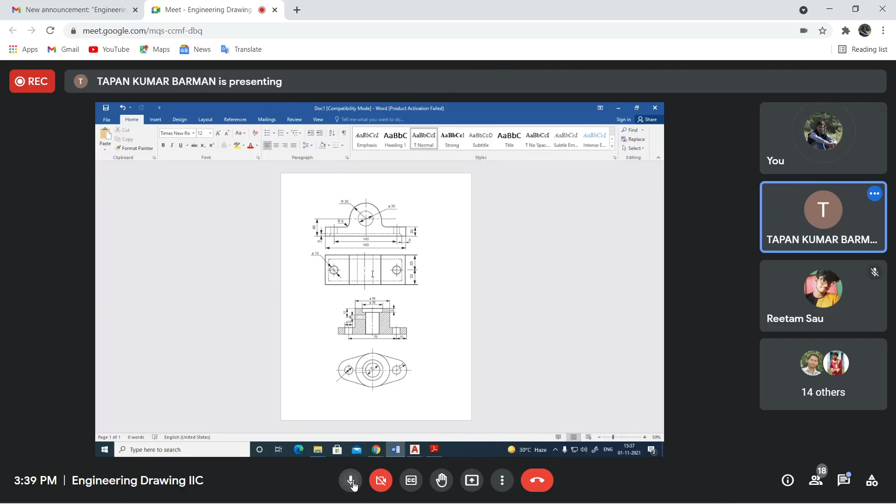Understand? But the position, this center line and this center line should be aligned. This whole position should be aligned, these two circles. Understand? So this view and this view are related. You cannot detach these two. Please put your questions so that we can discuss and solve the issues.

Tell me. Any question? Any question from your side? No, sir.

Okay. Now tell me, from the 16th, are you coming to the university?